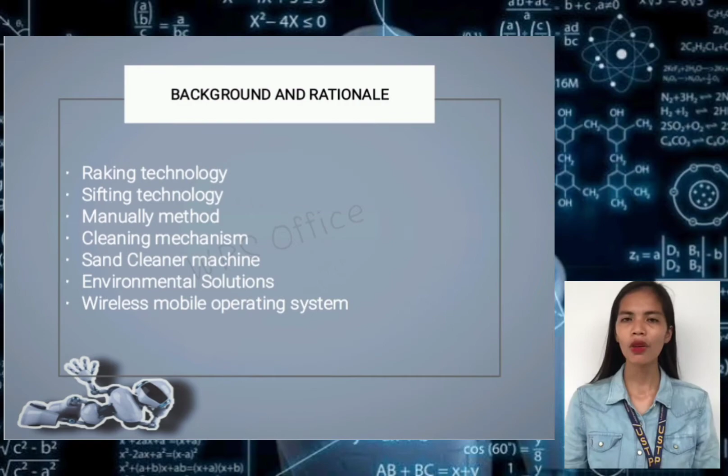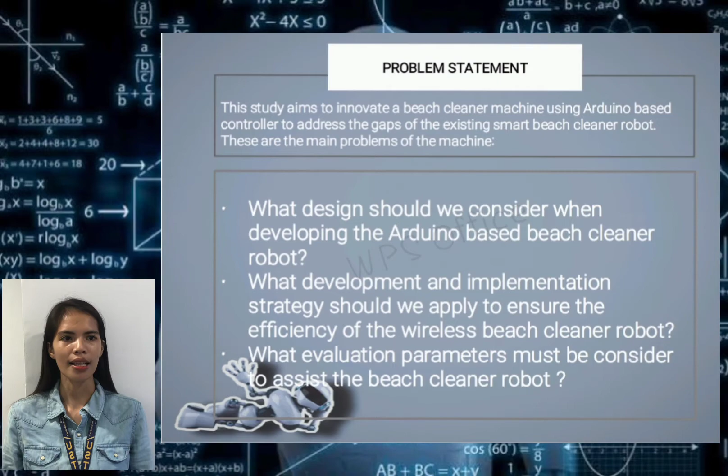And for problem statement, this study aims to innovate a beach cleaner machine using Arduino-based controller to address the gaps of the existing smart beach cleaner robot. These are the main problems of the machine. What design should we consider in developing the Arduino-based beach cleaner robot? What development and implementation strategy should we apply to ensure the efficiency of the wireless beach cleaner robot? What evaluation parameters must be considered to assess the beach cleaner robot? And for the objectives of the study, let's have Mr. Jade Singa.

Thank you, Ms. Cervantes. The main objective is to design and develop the wireless mobile operated beach cleaner robot. So, the specific objectives are to design and develop an Arduino-based beach cleaning machine operated by smartphone via Bluetooth and design the manual mode operation of the machine. The second one is to develop and implement a wireless mobile operated beach cleaner robot using Arduino-based controller which is programmable by the use of software to perform a convenient operation.

The third one, to evaluate the efficiency of the wireless mobile operated beach cleaner robot based on the evaluation of the parameters in order to identify the strengths and weaknesses of the machine. So for further discussion, let's have Ms. Sadja Mamasabayang. Ms. Sadja?

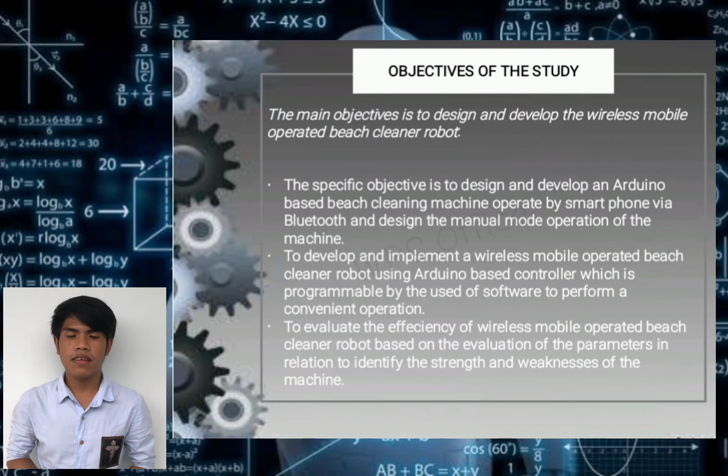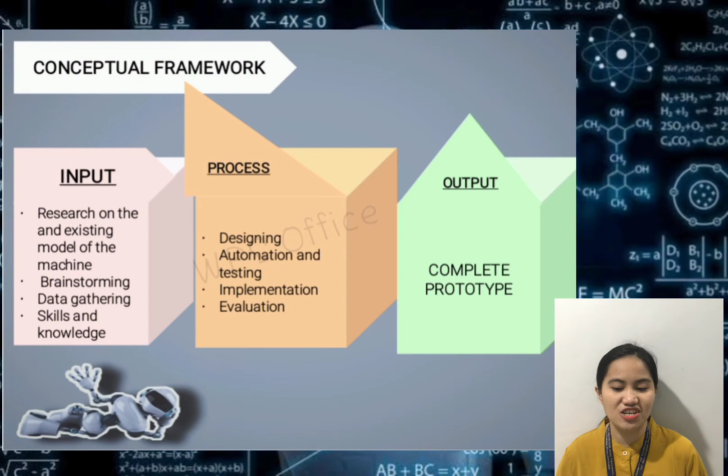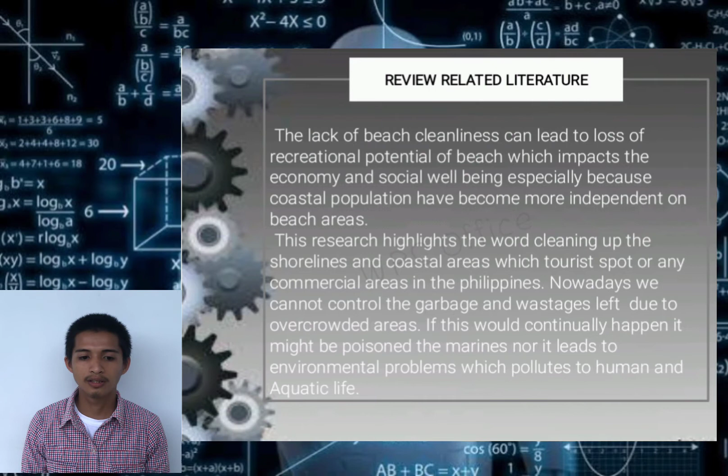Thank you, Ms. Sadia, and now I'm going to discuss the review of related literature. One of the most effective methods in cleaning the beach is by the use of a beach cleaner machine, an innovation that removes wastage from beaches, lakes, and rivers to make the tourist spots sustainable for beachgoers or tourists. Various beach cleaners can be used to effectively remove litter, sharp shells, glass, rock, and excessive seaweeds from the beach. Beach cleaners have two types. These are mechanical raking and sifting technology.

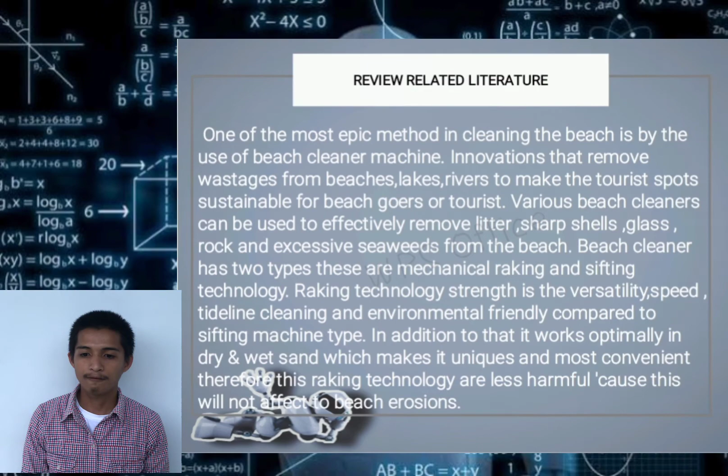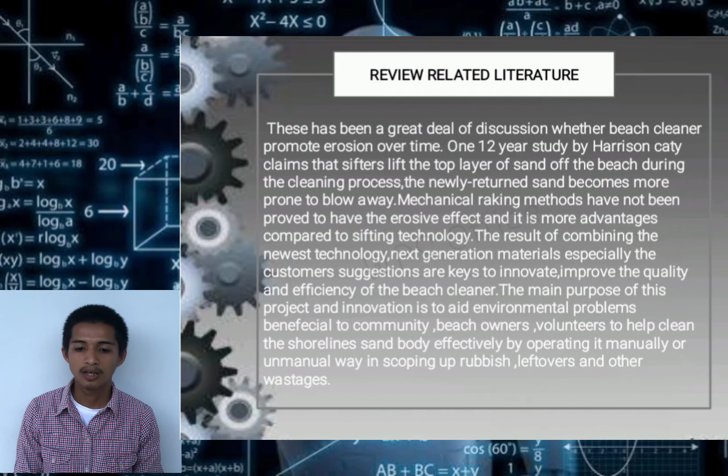Raking technology's strengths are versatility, speed, tide line cleaning, and being environmentally friendly compared to the sifting machine type. In addition to that, it works optimally in dry and wet sand, which makes it unique and most convenient. Therefore, this raking technology is less harmful because it will not affect beach erosion. The main purpose of this project and innovation is to aid environmental problems, beneficial to community beach owners and volunteers, to help clean the shoreline sand effectively by operating it manually and or unmanually in scooping up rubbish, leftovers, and other wastage. And for conceptual design and working methodology, let's have Mr. Indoy.

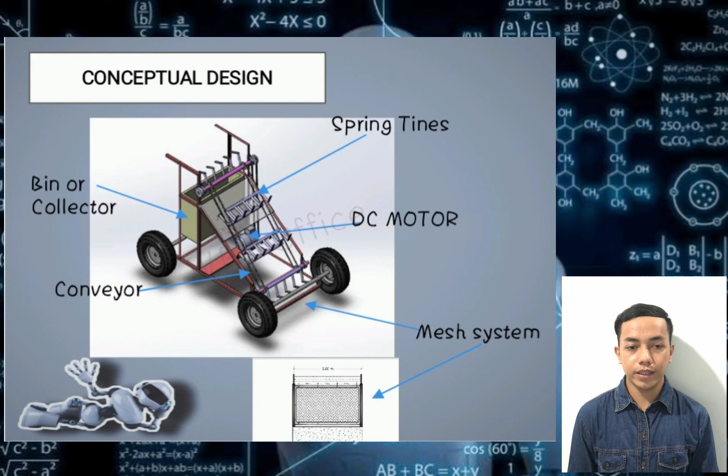Thank you, Mr. Quezon. And now, this is our conceptual design. Technically, based on the existing beach cleaner robots from year 2015 to year 2020, pertaining to the innovation and development of their robots, they implement artificial intelligence, remote controller, tractor towed, fossil fuel, and the other one uses solar power. But the difference from the existing models towards our own innovation is that we can operate manually. Aside from energizing electricity, we tend to use a solar powered battery with voltmeter to check the battery percentage and the LED light for night shift operation if necessary.

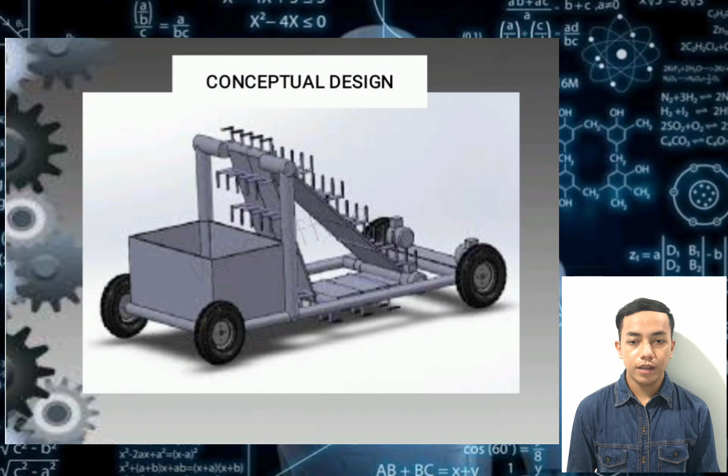Our project is for sand land basis only, using caster wheel type for front wheels, and for back wheels we use off-road sand paddle, and of course from the title itself, wireless mobile. So we tend to use a smartphone via Bluetooth with an application through Arduino Droid. And for working methodology, first the rotation of wheels by pushing or towing the machine, the rotation of the shaft, which directly rotates the conveyor rake system. Spokes collect the waste, the waste gets locked between spokes, and lastly, the waste is transported up the conveyor rake system and deposited in the waste box.